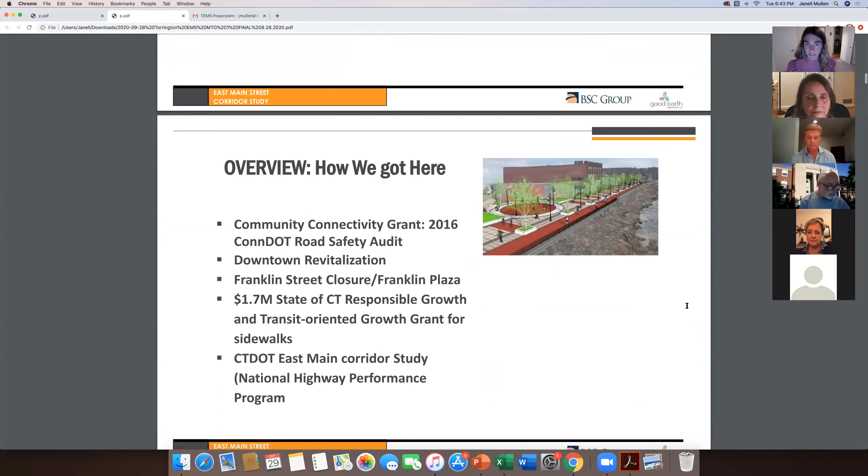Great, thank you, Mayor. Before we get started, I just wanted to let everyone know that we aren't making any decisions this evening. The purpose is really just to have an informational session and introduce everyone to the project and discuss where we are and where we plan to go.

And that said, I'll turn it over to Rista. Yeah, Mayor, did you want to talk a few minutes about this slide? So yeah, let me, because on my iPhone, that's a very small slide. Let me pull this up. Okay, so the overview, you know how we got here.

As I was saying earlier in my opening comments, over the last several years, what we've recognized is that there's been a tremendous amount of development in the city of Torrington over the decades. And a lot of it has been occurring in isolation. You'd see spits and spurts of it here and there. You'd see a cluster of development in one area with no real connection to the other areas of the city.

There was a way to get from point A to point B, but there was no smooth transition, no identification or signage or wayfinding that told you where you're going and why you're going there. So over the last 5 or 6 years, through the Economic Development Office, there's been great focus given on that connectivity.

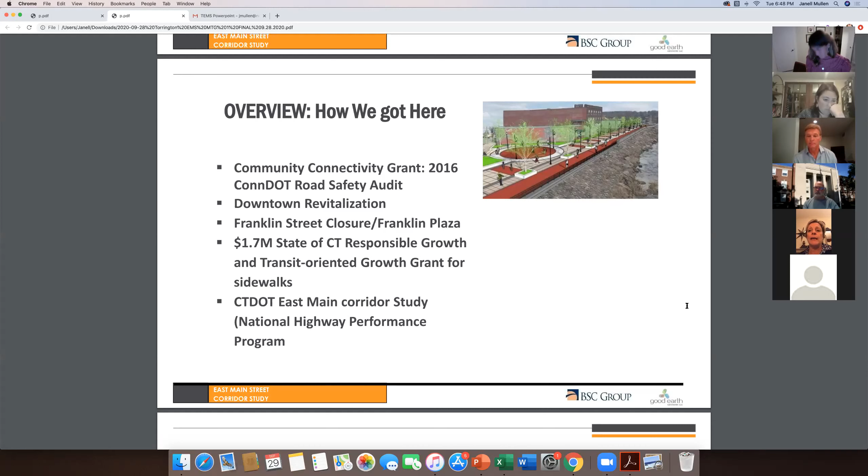The investment that we make in an area such as Franklin Street then becomes the welcome mat to further development, similar to what we're having with Penrose, which is a little bit further down Franklin Street, and potentially setting the stage for more development around the corner where the Nidec property was.

So fast forward to the East Main Street, the work that we recognized. As soon as you identify one street that sort of feeds into another street, like Franklin Drive and Franklin Street and Franklin Plaza now feed into Main Street and East Main Street, we recognize that...

It's kind of, you identify a problem and then it just highlights all those other problems that exist. And we quickly came to the conclusion that sidewalks were desperately needed to be continued and improved on Lower East Main Street and continued all the way up Main Street.

RISTA, again, being so hyper-focused on a walkable community, chased a grant through the Connecticut Responsible Growth and Transit-Oriented Development grant opportunity and was thankfully awarded $1.7 million for us to undertake construction of sidewalks up East Main Street.

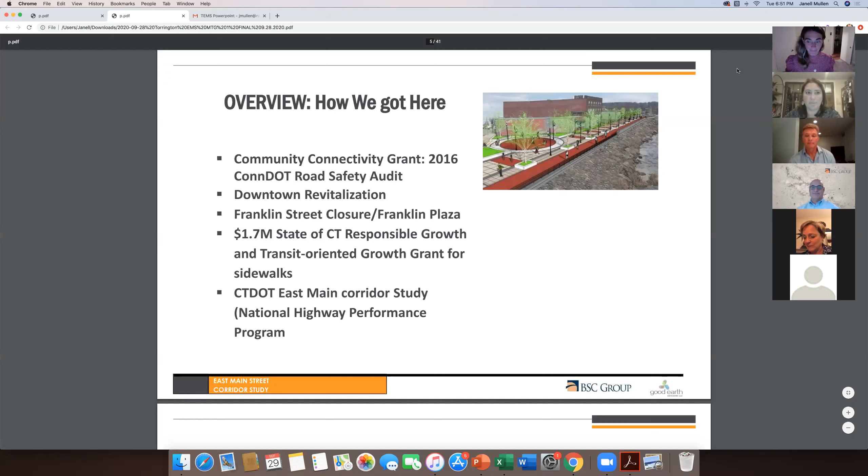I just want to take a few minutes before we get into the technical advisory committee to just give you a quick summary of what the study is all about and what some of the goals are.

As you just heard the mayor talk, the city has been putting a lot of effort into improvements along the corridor, and if you're at all familiar with the corridor, you also know that there has been a lot of private and commercial development over the past several years. If you're familiar with the corridor, you also know that there's a wide variety of challenges.

The way the corridor feels down in downtown is different than up by Target, but we know that it can impact the whole corridor traffic or development.

So we jumped at the opportunity, like the mayor said, to do a comprehensive study. We knew this couldn't just be another traffic study—it has to be more than that. We have to look at all forms of transportation, existing uses, what regulations and guidelines impact development, where there's room for future development, and look at it as a whole to determine what recommendations we can make and strategies we can put into the plan to guide smart growth.

So we developed a technical advisory committee that was well-rounded, that could help advise our consultants and work closely with them to do this.

Mayor Carbone is part of the technical advisory committee, myself as city planner looking at regulations and zoning, and Paul Cousins, our deputy public works director and city engineer, who's doing a lot of the design work for sidewalks and makes recommendations on site plans.

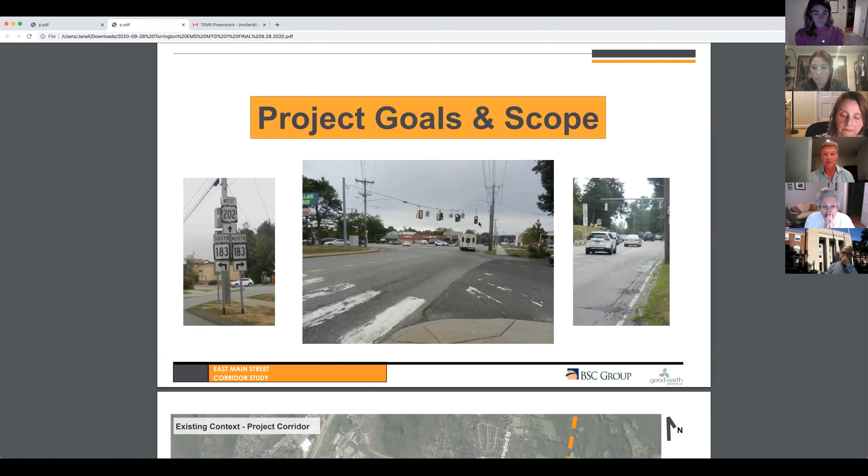So, as most studies go, we do have project goals and a scope. If we could skip ahead to the next slide.

The limits of the project in this aerial view, as you can see, this corridor stretches from the lower left at the Main Street, East Main Street intersection, heading northeast to the right, all the way up to the Torrington, New Hartford line. That is 3.5 miles of corridor. It involves segments with multi-lane sections. There are 16 signalized intersections and multiple access points to commercial and residential properties. Going ahead to the project goals of the study.

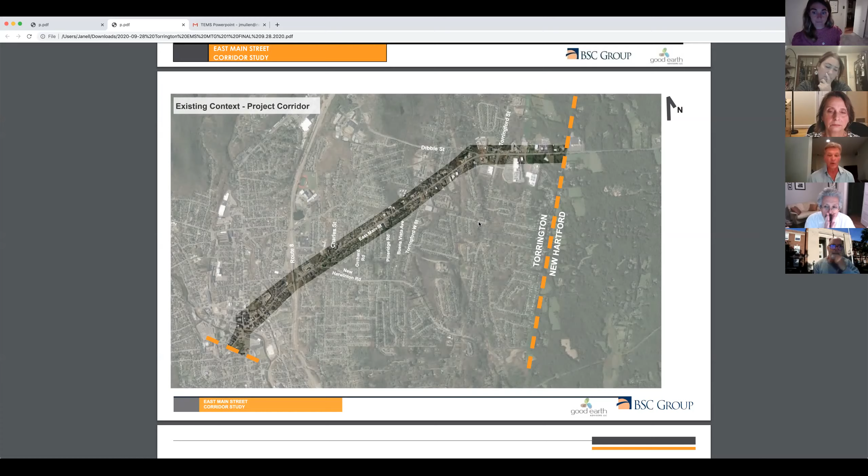Obviously, but first and foremost, traffic congestion and safety is a primary issue, safety concerning some already discovered accident points that have histories of being unsafe.

Connectivity between abutting residential neighborhoods in the corridor is something we're looking at, to make the corridor more accessible to the many residential, and somewhat dense, residential neighborhoods that surround the corridor. Rather surprising when we first looked at it, it's been commented on several times.

Best practices for multimodal transportation has been mentioned by Rista and the mayor as well, striking a balance between the pedestrian, cyclists, and maybe transit patterns and bus commuters. This is something we're looking into, to possibly make everybody coexist, or at least these three coexist safely with vehicular improvements along the corridor.

And again, another major goal is to encourage sustainable growth patterns. That's going to be explained in more detail later on, but economic development, not only growth for businesses along the corridor that exist now, but future businesses, and a strategy to develop future commercial business along the corridor as well. So another goal.

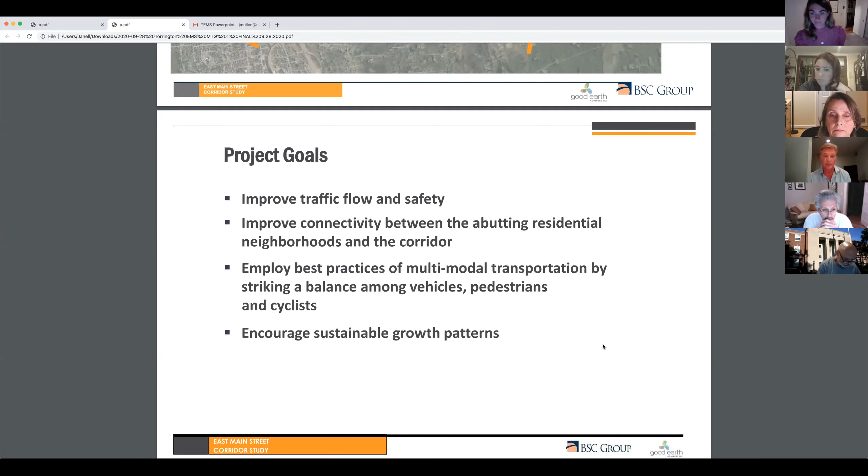Skipping ahead to the scope of the study. We're engineers, planners, and landscape architects, and we need existing data to form the foundation for any recommendations and conceptual development we may recommend. So we've conducted a field survey and collected existing traffic data, which is necessary to continue with the study. Those have a life of about 3 years. That's been completed.

Traffic operations and safety, including sidewalks. That's going back to traffic operations, but also touching base with folks in town, the chief of police, for example, going back through accident records, and taking a good look at trying to assess what's going on out there traffic-wise.

Physical context, I won't get into that right now because that's the next segment of the presentation. But moving on, developing transportation improvement alternatives. This is a huge part of the study. It involves taking the foundation formed by collecting all the existing data and then coming up with solutions.

In this particular corridor, there are segments and pieces which require different transportation improvements in our opinion so far. Some have unusual traffic congestion. Some need safety improvement, but others, like the downtown corridor, could lend itself to more connectivity, for example. We'll get into some of these things as the presentation goes on.

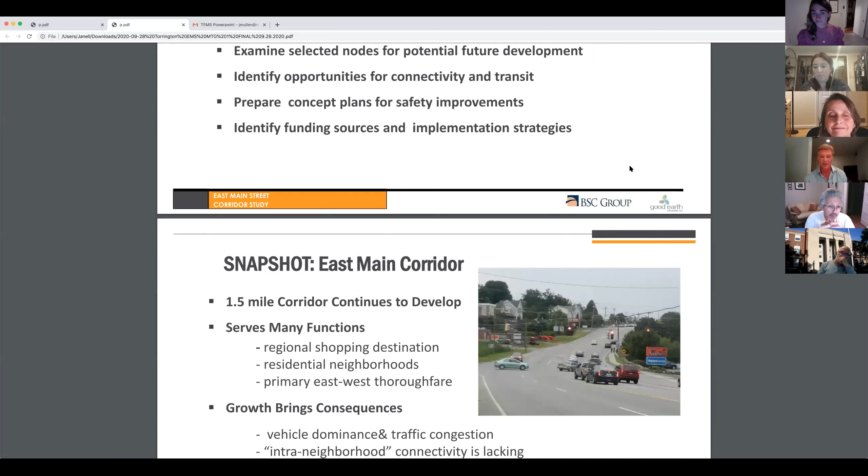So the next slide identifies a snapshot of, I believe, the last 1.5 miles. Val, you want to take one, or context, or should I? Val? I'm unmuting.

Yeah, this is where my part starts. Yeah, okay, thought so. Thanks, Dale. I just wanted to give a little bit of a snapshot of the corridor, and then Michael Klutchman and I are going to take you through some of the physical context that Dale had alluded to.

As the mayor aptly said, this is a corridor that continues to evolve, has evolved really since, unfortunately, some of our mainstay of Main Street has left and vacated and headed up East Main Street. The entire corridor is about 3.1 miles long, and about 1.5 miles of the corridor seems to be continuing to develop.

And I want folks to understand the distinction. A lot of times when people think of development, they think, oh, there's a green field, there's green space there, and it's going to become development. But what we're actually seeing along East Main is expansions and infill development. So developers are maybe cobbling smaller things together, making larger parcels or making them different. So that's a distinction that's certainly in force as we speak today.

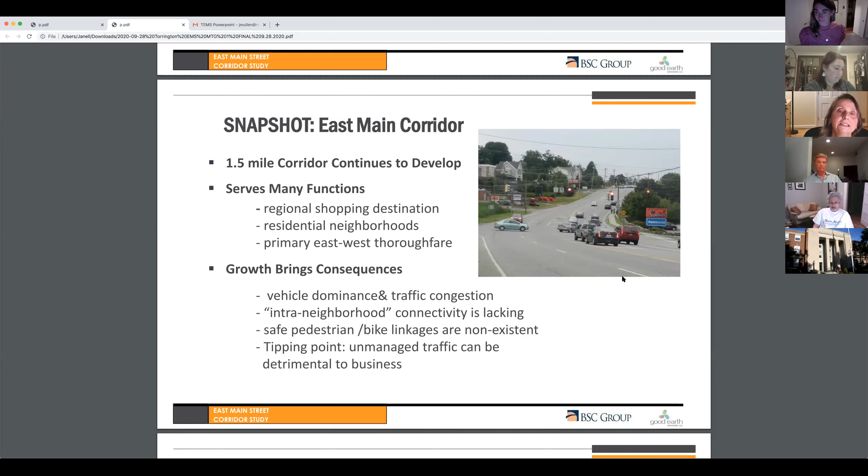And then certainly, my last point, we are at a tipping point that if you don't manage traffic and you don't understand the linkage between traffic and land use and how people live, you really can affect not just quality of life, but businesses. When there's a lot of traffic, you tend to attract national retailers, and they love those traffic counts. You get too high traffic counts, and then it's a detriment to business. So we're talking about striking a balance here.

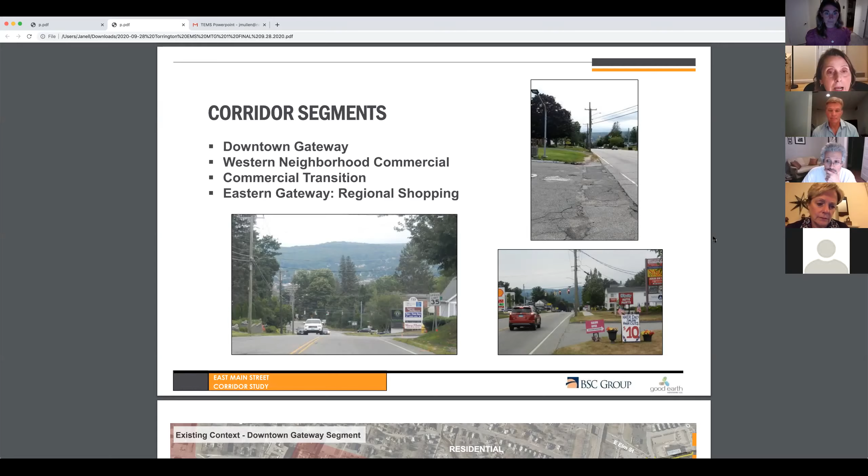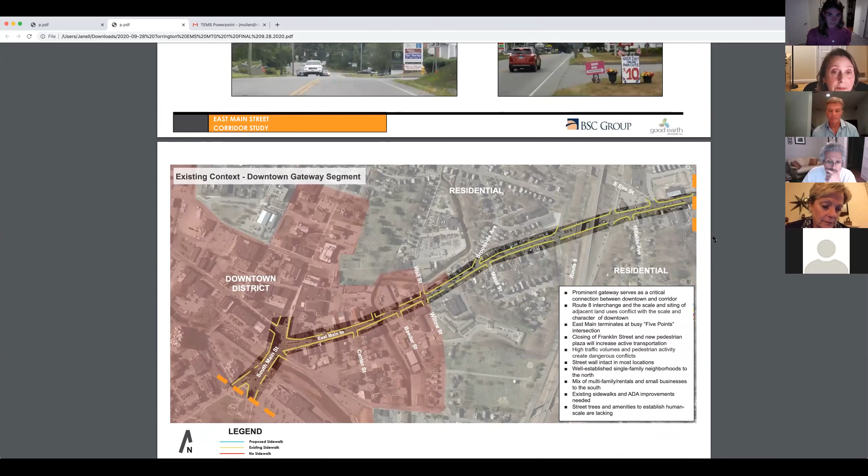In general, the corridor climbs from the western segment to the eastern segment, and you folks know more than I do, that it climbs significantly in some cases. In general, what we've done is we've broken the corridor up into 4 sections.

There are certainly similar characteristics throughout this corridor, but in these 4 segments, we've differentiated in certain aspects to really call out the corridor as it evolves from downtown to the city line to New Hartford. I'm going to talk a little bit about general context, and then Michael Klutchman is going to add more flavor in terms of urban fabric, but we won't belabor each slide. We do want to touch on a number of highlights.

The first one is probably the most obvious in terms of the downtown fabric. A portion of it, as you can see from 5 Points and our new Franklin Plaza, starts there and heads up and stops just beyond the glass building. Part of this is within the downtown district zone, and certainly the climb in terms of the corridor doesn't start till just beyond the glass building. But this segment really feels like downtown. There's a couple areas like around the Rite Aid and some automotive uses, but it really hugs the corridor and still feels like downtown here. And clearly it is the gateway.

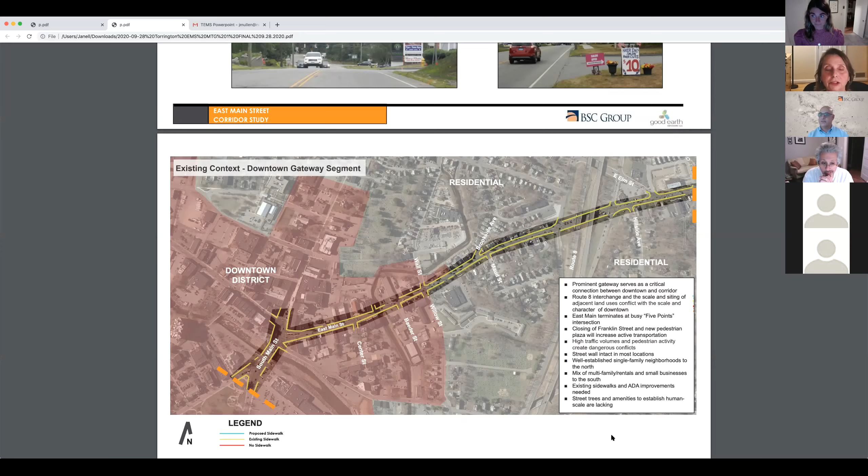So this next segment, I think you folks just looking at this, it looks different. Definitely looks different. We're calling this the Western Neighborhood Commercial segment, because yeah, it's Western, but more importantly, there's really more distinction of a mix of neighborhood and commercial, some residential.

In fact, this segment is, I believe, the only segment in the entire corridor where there is actually a residential zone fronting, I think it's R6, fronting East Main Street. And R6, by the way, is a 6,000 square foot lot under the city's zoning regs. So for the most part, we've got small businesses on the south side and then residential on the north side.

Right as we come out of the downtown gateway segment, that's where it really starts to climb. And as Michael noted, we know we're going up. But when you're starting to walk it, and Lord knows if you try to bike it, that's when you realize how much of a significant climb, particularly in that segment that you're hitting.

So as we move eastward, there's more businesses, and as you can see towards that eastern side, there are more commercial, more larger businesses. And of course, that segment ends at the newly renovated, well, it's the old bowling alley, but we're now calling it Skytop, and they've done a wonderful job of redeveloping that. So there's that transition out of more of the downtown feel into more of a commercial segment. But again, not large lots, not large users, although there is starting to be a transition from west to east.

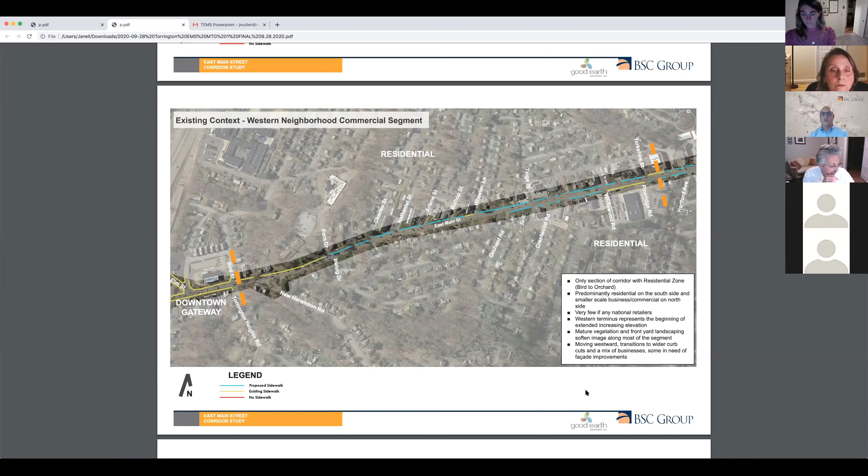Okay, next, Janelle, please. Thank you. So this third segment is what we're calling the commercial transition segment. And we're calling that because in this leg, there really is a clear transition to more high density commercial businesses.

There are at least 4 auto dealers in a row in this segment. The land uses are certainly more intensive and larger. There is significant development around the Torringford West intersection where the new Cumberland Farms is.

There's also across from the auto dealers, there's the Enterprise Rent-A-Car business and a couple other smaller businesses there, also Pizza Palace. I'm noting that because they're so close to the right-of-way, the corridor right-of-way, there's almost no room to pull in. There's almost no maneuvering there.

So in this segment, there's a lot going on. But besides that corridor, there is a lot of large residential, multifamily residential. I think we've got Koury Terrace. We've got Laurel Acres, like right behind Cumberland Farms. I think to the south, well, we have the Torringford Elementary School, of course.

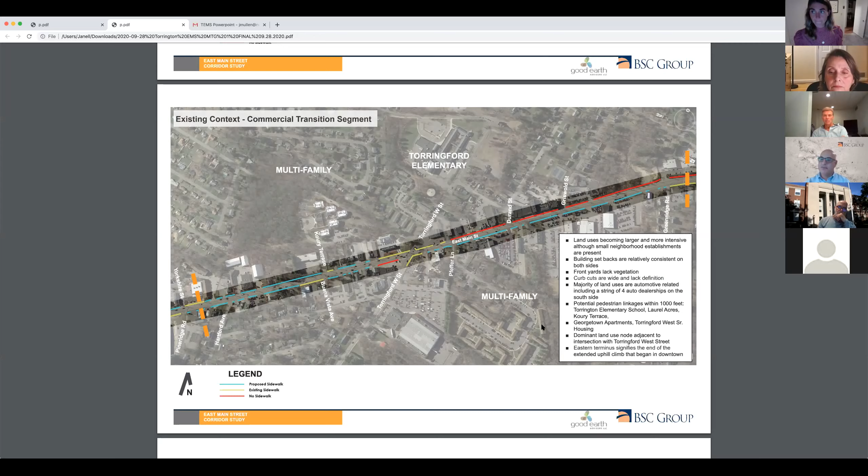Great, thank you. Okay, lastly, as we all know, not very creative here, but we're calling it the Eastern Gateway, obviously, because it is, and it's also the regional shopping segment. As you all know, this is characterized by very large national retailers, and for the most part they're really reflecting what we now call a suburban retail format.

Interestingly, if you go onto Google, you can see the pattern emerge. The residential in this segment changes dramatically because it's becoming more rural residential than maybe the suburban subdivision types that are in the other segments, as well as the downtown, which is much denser. So we're getting into the rural area, obviously we're heading into New Hartford, so things are changing quickly.

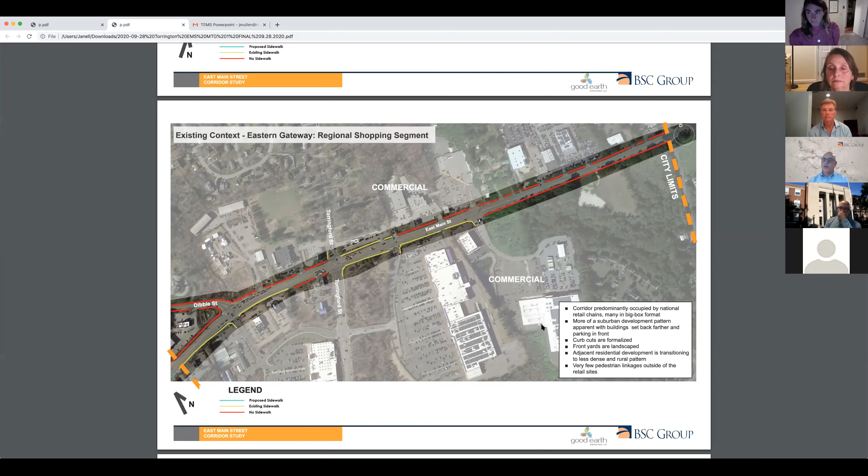That is the physical context, and we now have Michael Santos from BSC to talk about the traffic studies that Dale alluded to earlier. There's a significant amount of traffic data and traffic assessments that they've done, at least for this existing conditions portion. In the future, we'll be digesting the traffic data and developing concepts once we listen to the public, and we have a better sense of direction on connectivity, and develop some recommendations. But Mike, you want to take them through? I don't know how much detail you want to share, but have at it.

My name's Mike Santos, I'm a traffic and transportation engineer with BSC Group, and I'm just going to talk briefly about what we have done to date so far for traffic and transportation evaluation. I'll be reiterating a lot of what was already said, just because we went down there and took an inventory of all the existing conditions. We noted all of the sidewalk deficiencies, and I'm not from Torrington, and I think my first visit down there, one of the biggest issues that I also noticed was that the sidewalks are very not continuous. It's very difficult to walk around there, and I know throughout the presentation there's been pretty good focus on that.

We went out and collected some traffic data, so we collected peak hour traffic counts. We can go down to the next slide. I'll just get into the questions first. I think this was part of the original poll. So how many cars travel along East Main Street every day? We did do some counts at several locations along East Main Street, so we know the answer to this. And we also did some research on safety, so we dug through ConnDOT data for the past 3 years and determined what the high crash locations are. And there are several of them.

So Ed, what are your thoughts? My thoughts, well, I'm going to probably say somewhere, I would think maybe 50,000 cars a day. That's pretty trafficked, that may be high. I'm torn between B and C. And then what about number 2? I would say if Torringford West is where BJ's is, I would say probably that intersection is one of the more dangerous ones. Okay, well, good answers.

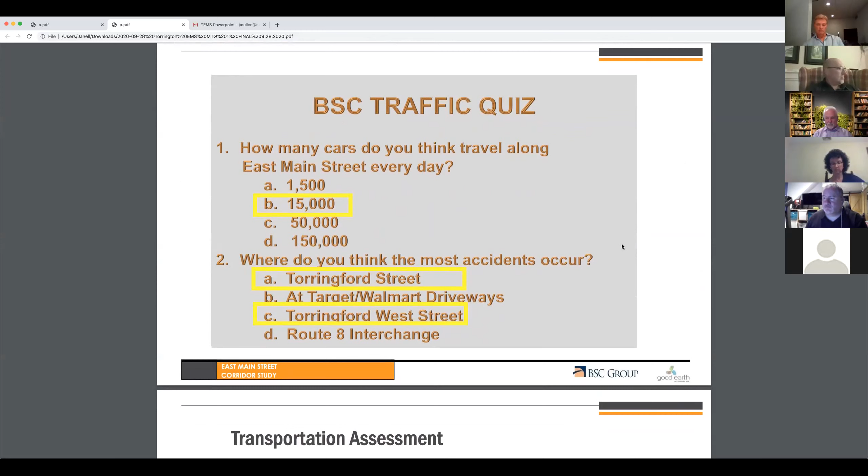So the traffic counts you're seeing, depending on where you are in the corridor, you're seeing anywhere between 11,000 to all the way up to about 20,000 throughout the corridor. The lower volumes are actually closer to the downtown area. The higher volumes are pretty much between Torringford Street and Route 4. But it's still pretty heavy, especially where you only have one lane in each direction, or 2 lanes in the eastbound direction, 1 lane in the westbound direction. Is that both directions, or just one direction? Yeah, that's both directions. I know it's kind of hard to visualize how many vehicles travel on any given roadway during a 24-hour period, but this is anywhere between 11 and 20,000. And two high crash locations were Torringford Street and Torringford West. I'll get into some of the reasons why we think that is the case later on.

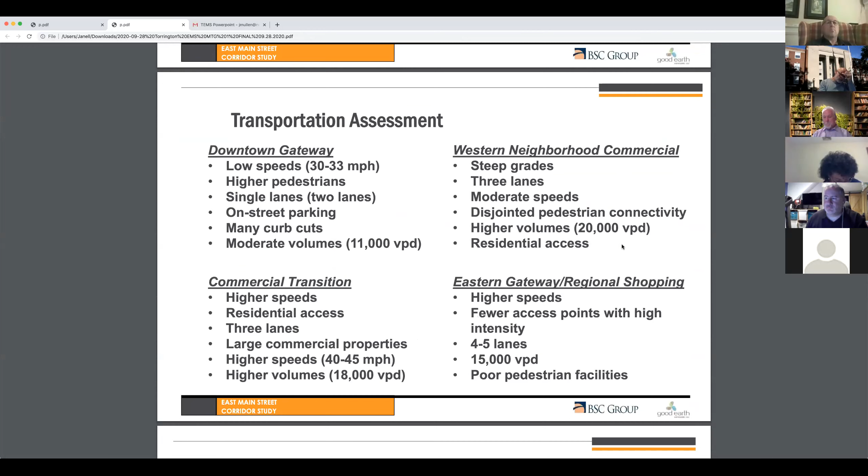So we can continue. Just to go over what we've done to date, we've collected some traffic count data throughout the corridor at all of the signalized intersections. I believe there's 16 or 17 locations, and at a few unsignalized locations.

So we looked at the peak hour morning and evening counts, along with the 24-hour counts. We did the counts last November for half of the corridor, and then we did some more counts this past March, about 2 weeks before the entire world shut down. We checked them with the ConnDOT data and they're pretty accurate, so I'm not too concerned that they're low due to what's going on in the world today. Fortunately, we were able to collect that data before everything shut down.

As Val and Michael had explained before, we broke this down into 4 segments. There's the downtown gateway segment. You're seeing lower speeds, there's parking lanes on either side of the road, there's pretty good sidewalks there - damaged in some locations, but there is good pedestrian connectivity. Single lane in each direction, it's a little bit more walkable community.

As we go towards the east through the Route 8 interchange and Route 4 and up the hill, you see steeper grades. A third lane is added to the eastbound direction, speeds increase a lot more, and that's where you see a drop-off in any pedestrian connectivity. There are some traffic signals that serve minor side streets, but even at those locations, the pedestrian signal equipment is either non-existent or not up to code for ADA compliance. So it's very hard for a pedestrian just to cross East Main Street.

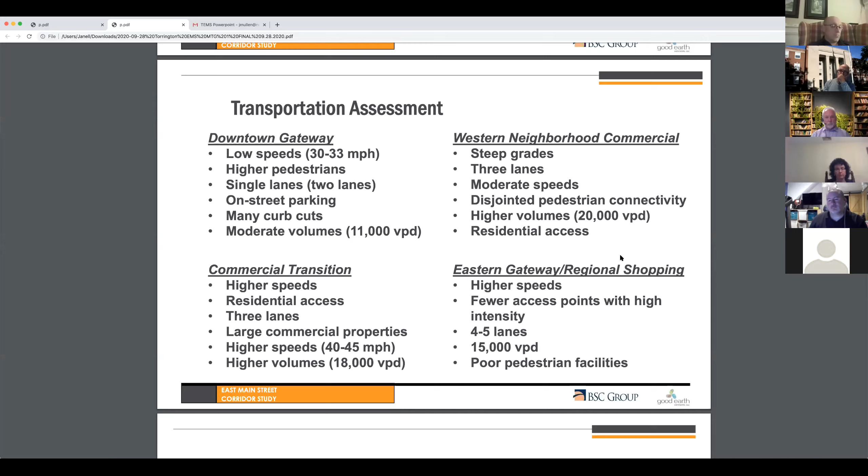So here's some of the locations we're currently focusing on. We did all of this existing conditions analysis, which is going to be the baseline in the framework for our final recommendations and solutions to any problems, trying to fix any issues we see out there. Some of the locations we're focusing on are the Route 8 interchange, and East Main Street from the Route 8 interchange all the way up to Route 4 - that's one area where we see a lot of conflicts.

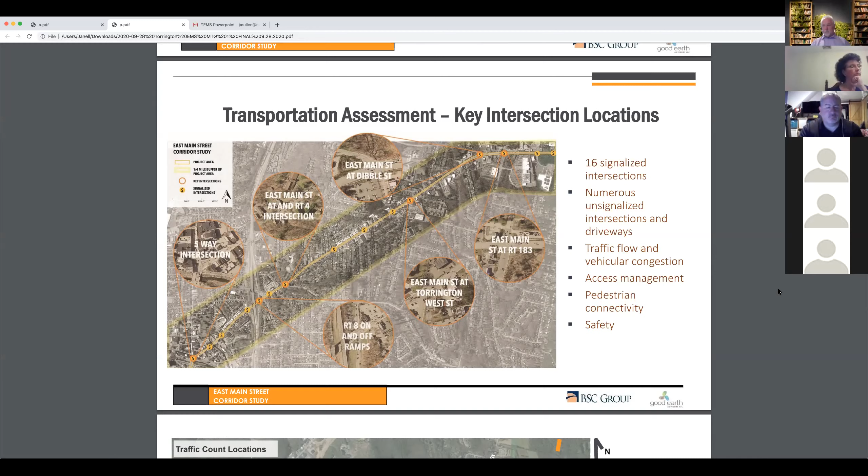So we can go to the next slide there.

This is just where we did the traffic counts. The yellow dots are the locations we collected in November of last year. The green ones are locations where we collected data in March of this year. This includes every single signalized intersection throughout the entire corridor, plus I believe 2 or 3 unsignalized locations that we counted.

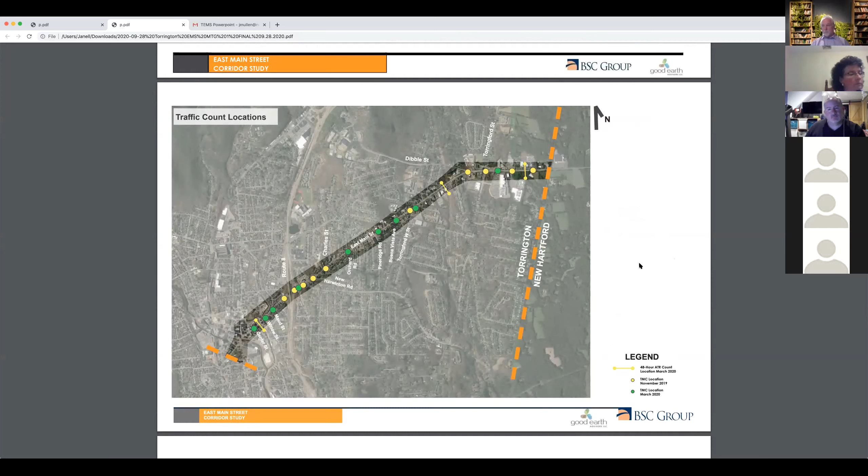We did look at traffic operations using the traffic counts that we had and all of the traffic signal timings, and doing observations out there to understand where congestion was happening. I understand it's a very congested roadway in general - probably not so much right now as it normally is. But the key locations we saw were - and these letters are level of service, which is basically a grade on how much vehicular delay drivers see at each intersection. It's rated from A to F, where A is lower delays and F is higher delays.

You see some of the intersections in the western part are A and B - that's where you have the low volume side streets. The traffic signals are generally green along East Main Street for most of the time, and the cycles are pretty short, so there's not a lot of delay there. Then as you get through the interchange and at New Harwinton Road at Route 4, you see some deterioration - you see D's and F's.

That's kind of due to the high traffic volumes on Route 4 and on East Main Street competing for the green time in the traffic signal. As you go to the east, there's not as much delay. Again, the side streets are low volume until you get to Torringford West, where you see the higher volumes, and again it's down to D&E. Then at Torringford Street you see delays, and then again at the Walmart and Target driveways. So the major intersections where you see the higher traffic volumes is where you're seeing the congestion happen.

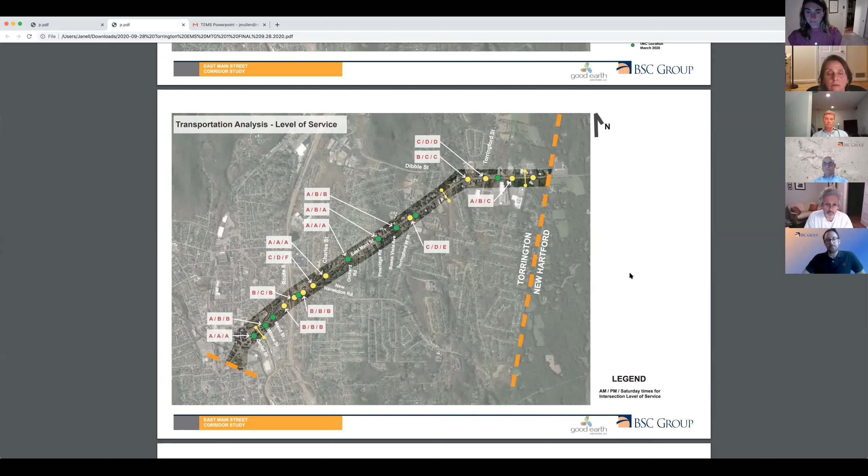Just to give you some reference, over the past 3 years, not including 2020 - so 2017, 18, and 19 - there were between 60 and 70 crashes at each location. So you're seeing more than 20 reported crashes a year at each location. That number could be higher for things that aren't reported, but that's the number of crashes reported with the police department.

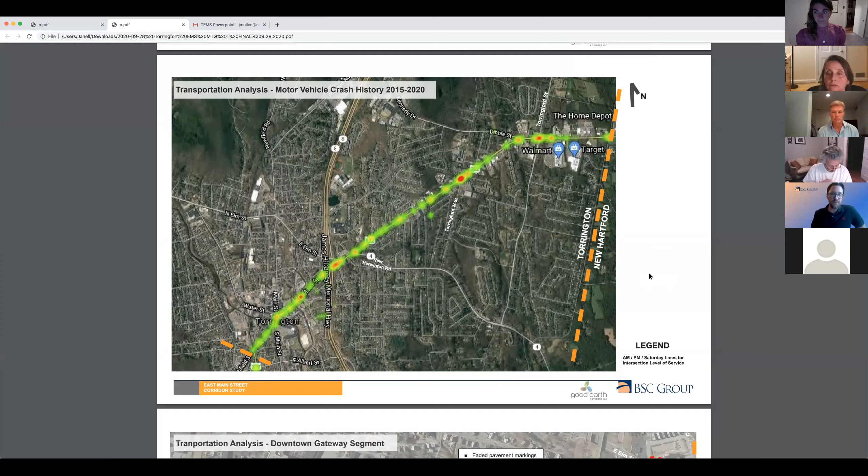Again, there's a lot of turning movements, especially at Torringford West. There's a lot of conflicts. There's no turn lanes on some approaches. Those things really contribute to what we call angle collisions, where you see a vehicle turning either colliding into a vehicle that's going through, or a through vehicle colliding into a turning vehicle. Eventually we'll get to some solutions for those existing issues, but right now we're just going to go over what we found. We can go to the next slide.

I'll just walk you through the 4 segments. I'll try to be brief about this, and I think a lot of this was already said. Again, this is a downtown gateway segment, and there's pretty good pedestrian connectivity. There's sidewalks on both sides. There are some wide curb cuts. There are a lot of curb cuts.

Some of these curb cuts actually serve businesses that are just kind of pull-in parking. When we were down there doing some site visits, we noticed that some of these businesses, the vehicles block the entire sidewalk and don't allow passage through. Some of the other issues that we saw down here are, again, left turns. There's a lot of curb cuts and there's pretty much unrestricted access, so there's a lot of left turns from the unsignalized locations in the driveways that create some safety issues.

Through the Route 8 interchange, we see there's some pavement issues. It's all cracked and the pavement markings aren't really there - they're either faded or missing. Most of the signal equipment throughout the entire corridor is outdated. There's some visibility issues where, especially during sunset and sunrise, the signals can be difficult to see with the glare. There's no backplates on them.

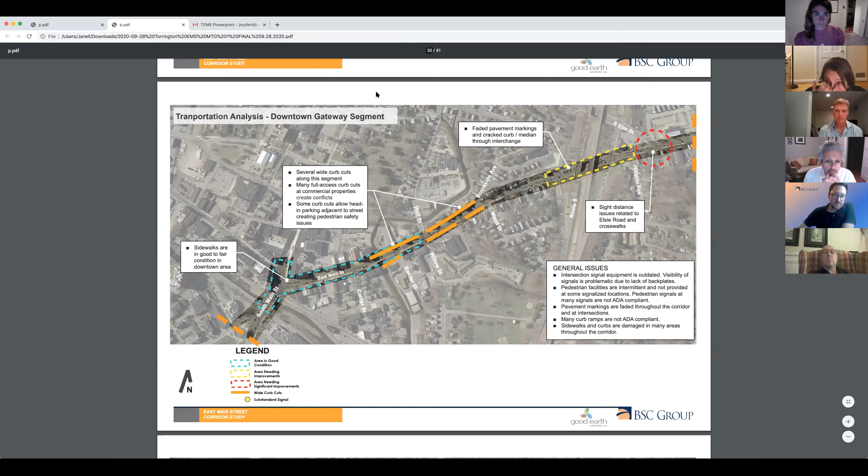Again, there's some capacity issues at Route 4. That's a tight situation there where we have 2 lanes in the eastbound direction, 1 lane in the westbound direction. I think we really need to add some capacity - there's just a single lane on Route 4. So with those geometric limitations and the amount of traffic that we're seeing there, it's really causing a lot of capacity and queuing and delays at that location.

And again, as we go to the east, I think this was already said several times, pedestrian facilities are lacking - they're missing, they're disjointed, discontinuous.

The pedestrian signal equipment at the traffic signals either is non-existent or it's not up to code. Again, that's a result of not having any sidewalks, so there's really no sense in having pedestrian equipment if there's nothing to connect to. And pretty much all the curb ramps at each location are not ADA compliant, so if you're someone in a wheelchair, you're going to have difficulty even crossing the street and getting back on the sidewalk where it does exist.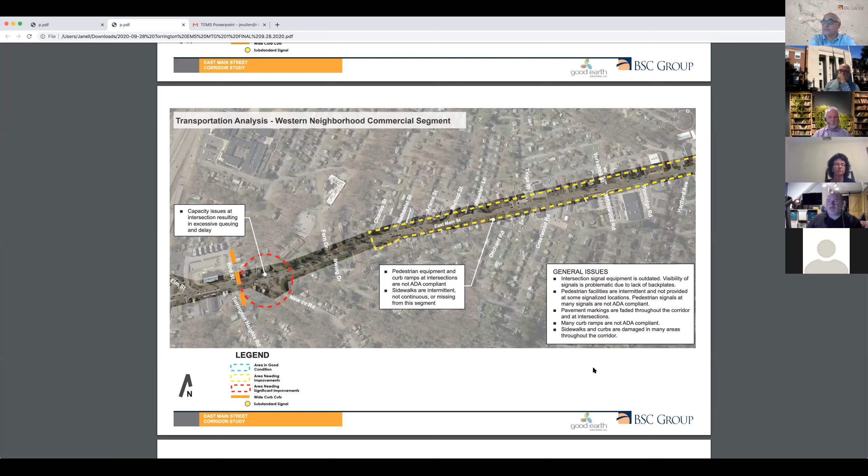We can go to the next one. So now we're in the commercial transition segment. It kind of centers around that Torringford West Street intersection. That location is a difficult one. There are a lot of curb cuts at the Cumberland Farms and at the property across the street, and they're very wide curb cuts. The circulation on each one of these respective sites is also confusing and not really well defined.

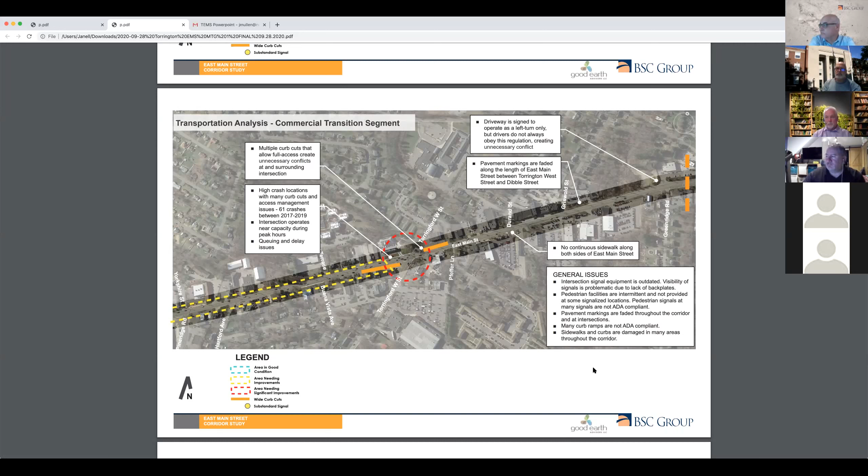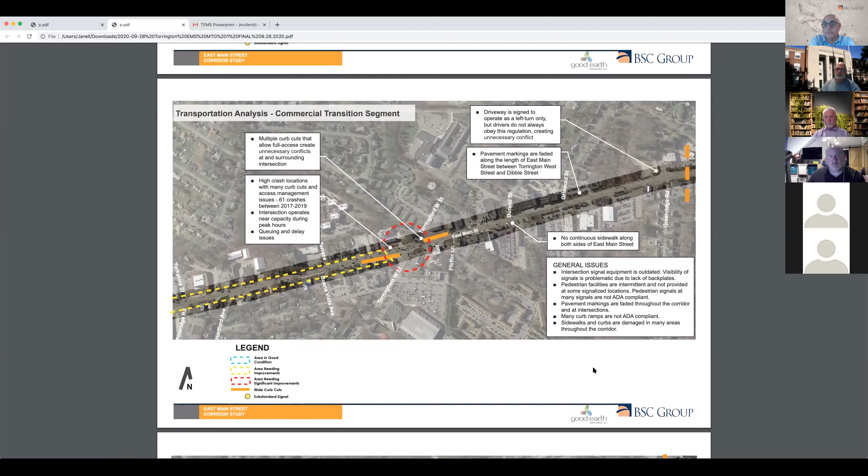Also, in the westbound direction, there's a left turn lane to turn left onto Torringford West, southbound. But just prior to that, there's also the BJ's driveway, and I think it's a Dunkin' Donuts, where you have a lot of people turning left from that turn lane that aren't actually going through the intersection. So there's just a lot of left turn conflicts at this location. And in the northbound and southbound directions, you don't have any turn lanes, so even turning left there is difficult. So this is something we'll be focusing on in this study, trying to come up with some good recommendations for what we can do there. So go to the next one.

And then finally, the easternmost segment - I talked about this a little while ago. The segment east of Torringford Street, between Torringford Street and Target, is essentially a 5-lane highway. It's just a very wide swath of pavement. There's a left turn lane in the westbound direction for Torringford Street, but it overlaps the Walmart driveway, so there's really no definition between where the left turn lane for Torringford Street ends and the left turn lane for the Walmart driveway begins.

There's not a lot of curb cuts here, but again, left turns are difficult to go across the 3 lanes of traffic at a minimum. And there are sidewalks at the Target driveway intersection, and there is a crosswalk that goes across the 5 lanes on the western leg. But again, the signal equipment doesn't really allow for safe passage. If you hit the pedestrian signal button there, you're basically walking when the Target driveway goes, and there are a lot of left turns from that Target driveway.

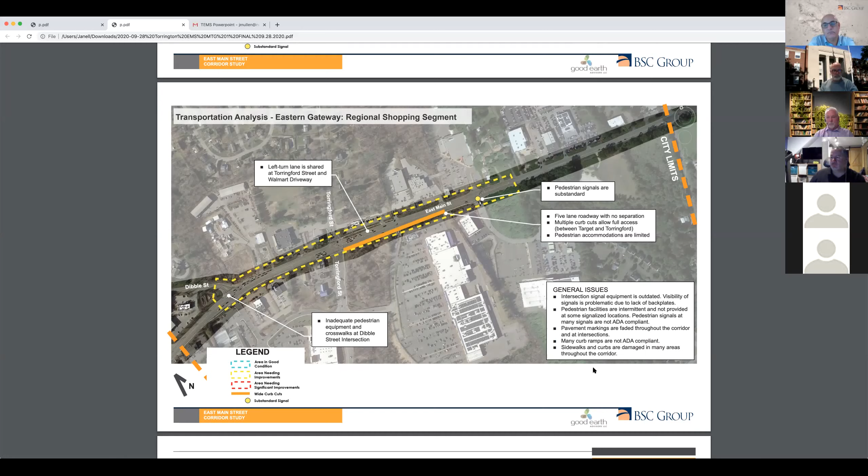So, I think that there's some improvements we can probably do with the pedestrian facilities throughout the entire corridor, at the traffic signals and along the sidewalks. So that was our existing conditions analysis. Safety, traffic volumes, congestion, pedestrian facilities are the things that we're focusing on. And again, we're going to use all of this information plus whatever input we get from the public or city officials to really come up with some good recommendations for improvements out here. And I think that's the last slide for traffic.

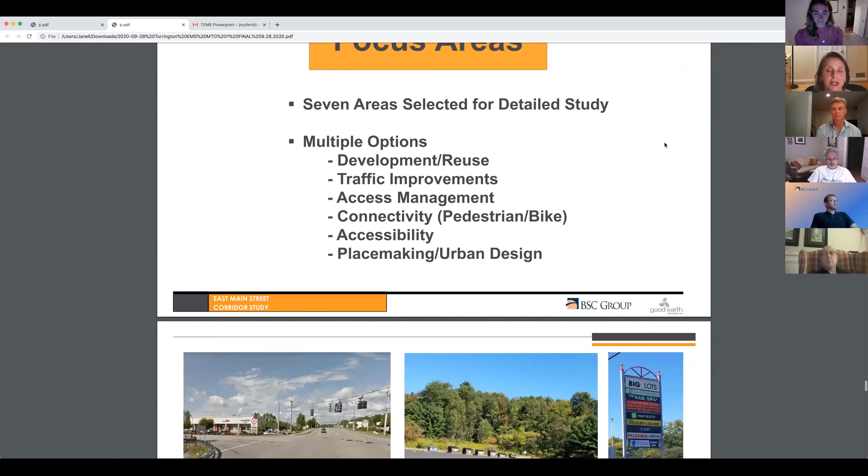So we're going to look at the Target Walmart area, Big Lots, particularly for the development behind Big Lots, the rear parcel, as well as Wendy's and the adjacent parcel I alluded to earlier, the Dibble Street cutoff, and there is a development parcel next to Valvoline. Next slide.

And then we have the former Rite Aid. We have obviously the iconic glass building, and we have basically that Route 8 node that includes Burger King and the Twin Colonies, so that area altogether.

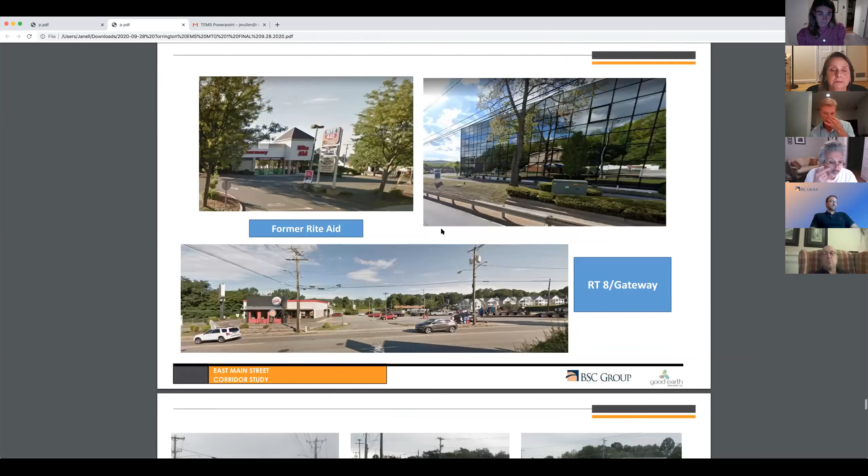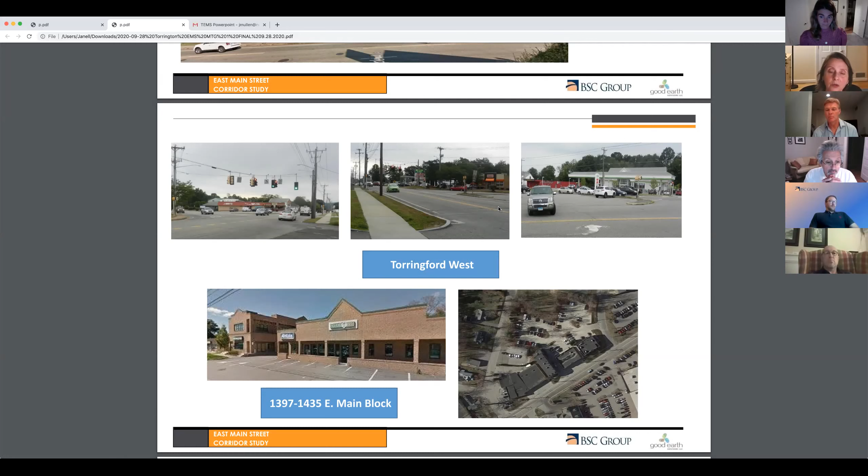And we also have, which obviously we've been talking a lot about, not just from a development standpoint, but from traffic, the Torringford West intersection and that area, including BJ's and Dunkin' Donuts and that area, as well as that East Main block that I talked about with Enterprise. You can see that front yard - you have about a car's length worth of front yard, and that's about it. So we want to look at that as well. But that will be for future - that's the kind of stuff we're going to be diving into in our next leg, along with these traffic recommendations that Mike has alluded to. Next slide.

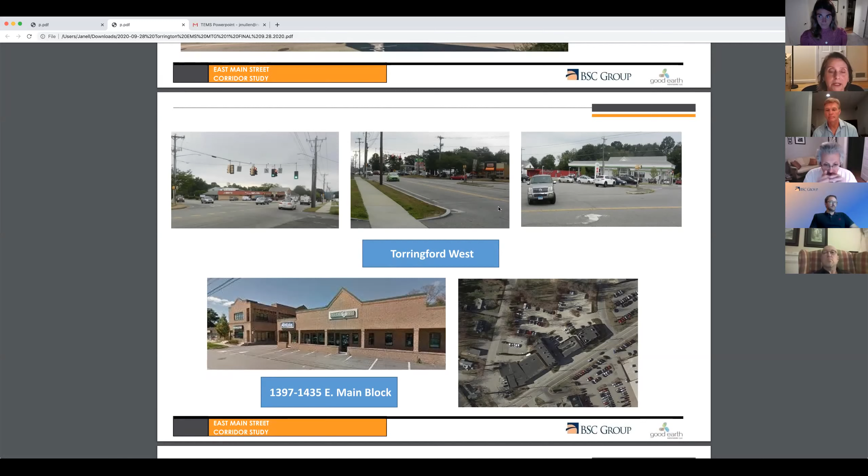So real quickly, we've done a lot of data collection and a lot of analyses. We've tried to summarize it tonight for you, and this presentation will be put on the city's website. But there's a lot of work to do in terms of talking to property owners and businesses. Most of this, in the age of COVID, we're going to be doing virtually, although when we can, Rista and I have been meeting with folks outside, wherever it's safe, as long as we can maintain safe social distancing.

And then, as I said, we're going to be developing recommendations. We need to look at these transit routes and some opportunities to create more transit opportunities. As we go through the data, we're going to be preparing site concepts for each of the focus areas we talked about, integrating all of the data we analyzed with the development nodes and the focus areas. What we hope to do is, maybe in December, come back with some recommendations to share with you. Eventually, if we can finalize those recommendations, we'll have another meeting sometime early in January. So that's really the big picture on our next steps.